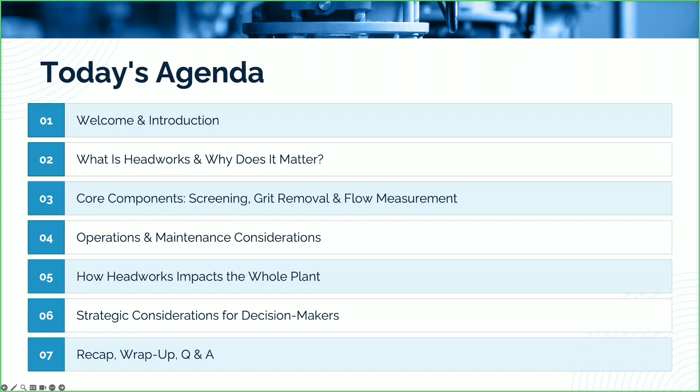All right, thank you everybody for joining us today in the first of our multi-part series on wastewater treatment, on the wastewater treatment train. Today we're going to be talking about the Headworks. We're going to start with what it is and why it matters. We'll talk about some core components, some O&M considerations, how the Headworks impacts the entire plant, particularly if it's not well maintained. We'll talk about some strategic considerations for decision makers, and then we'll have our recap, wrap up, and Q&A. As Zoe said, I'm a research engineer at the Southwest Environmental Finance Center.

We are in Albuquerque, New Mexico, close to the banks of the Rio Grande, and we do a lot of this kind of training and technical service. I've been with us for about 11 years now.

As we get started, I'd like to take about 30 seconds to just get a quick poll of who's in the room. I think we had over 600 registrants, but this is always good to give us an idea of who we are talking to today. Zoe, if you wouldn't mind firing up the first poll really quick, we'll give it about 30 seconds just to determine: are we looking at mostly wastewater operators or trainees? Are you a utility manager or director? I realize that particularly with small utilities, people wear a lot of hats, so if you sort of fall into more than one category, just pick the hat that you wear the most.

All right, it looks like most folks have voted. 7% as wastewater operator, trainee, or plant staff. We have 3% as utility manager, director, or board member, 58% as regulator or other government official, 21% as engineer, consultant, or TA provider, and 10% as other.

Okie dokie, pretty knowledgeable crowd here. Thanks for joining us.

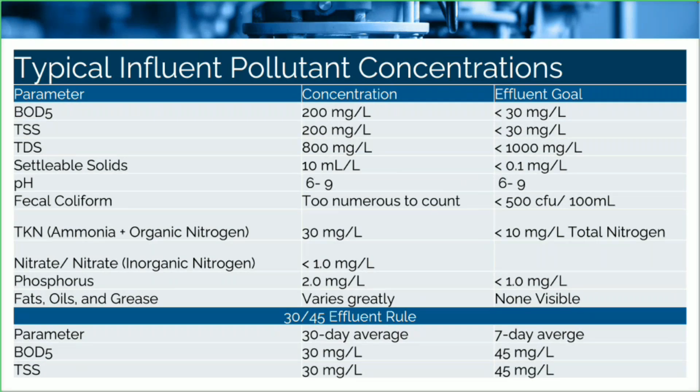What this largely ignores is all of the other stuff that ends up at your treatment plant as part of the influent stream that we have to get rid of in order to effectively treat our effluent. Basically, what I'm talking about here is trash - large, non-digestible organics like bone and sticks and roots, inorganic material like glass and sand and rocks, rags, building material, toys, pretty much anything that can end up in the sewer, including those non-flushable, flushable wipes that people insist on putting down the toilet.

There is a lot of debris that can show up in influent, whether you have just a normal collection system, or even more so if you've got a combined system, like the city of San Francisco, where stormwater is also a factor. So dealing with this extra debris is really what the Headworks are all about. It's as important as any of the other stages. It really sets everything else up for success, and in many cases, the long-term efficiency of your later treatment stages really depends on the Headworks functioning correctly.

Then we move on to our primary treatment, which is mostly physical treatment, clarification and settling. Secondary treatment, biological steps, some sort of disinfection, either UV, or if it's chlorine, then we're going to add a dechlorination stage as well. And then eventually some sort of discharge, whether that's to a complete evaporation lagoon for some of the small systems we have out here, or for land application, or into one of the waters of the United States, in which case you're going to have an NPDES permit.

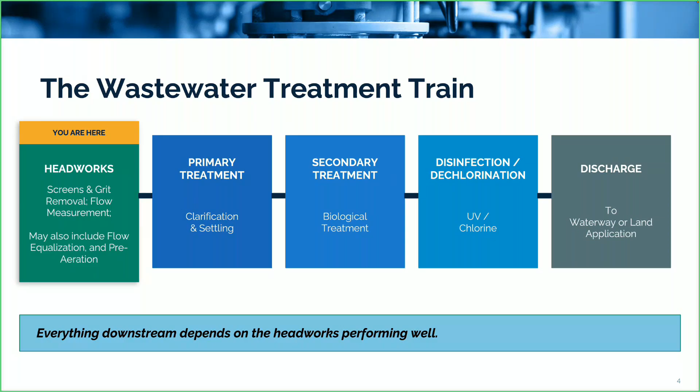Within the Headworks, we've got a number of physical processes that are going on, starting with screening, which is taking out coarse materials with the larger bar racks and trash racks. We might have fine screening to take out smaller components. Then we've typically got a grit removal stage, which is focused on sand and gravel and similarly sized detritus.

We might have a pre-aeration stage or a flow equalization stage, which is essentially just a set of basins or holding tanks where we can keep excess flow from either peak events or from peak flow times during the day, and run it through the treatment plant without dealing with those sort of peaks and swells, to even out our treatment processes.

Last but not least, and really, really important, is the flow metering stage of this. I see this a lot in smaller systems that I work with, both in our state and others, where flow metering is something that they don't either pay attention to very well, or the equipment is not well maintained. And as we'll see, if you are not paying attention to flow metering equipment, it is very hard to prove that you are staying within your permit discharge and flow limits.

And it makes it much, much harder to ensure that your processes are working the way they're supposed to. You will notice there is some reiteration in this session, but really everything downstream really depends on working well on the headworks.

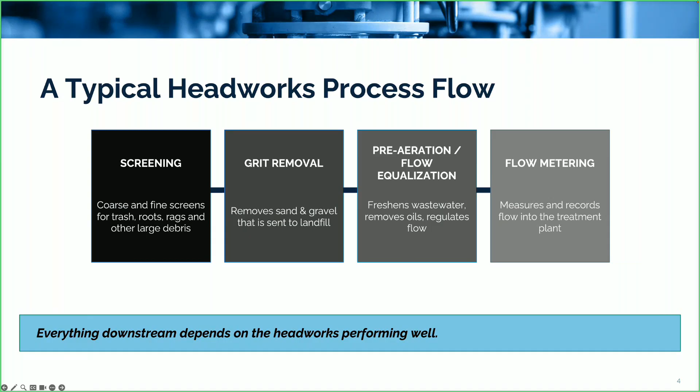For those of you who are operators or are some way involved in the wastewater treatment process, not on a consulting or regulating basis - of these four Headworks components that I've mentioned, which of these do you actually use? So if you can fire up the second poll question here: screening, grit removal, pre-aeration, flow equalization, and flow metering. Which of those do you have in your current facility, or is this just not applicable to you because you're not actually running a facility?

All right, it looks like most folks have voted. 30% said screening, 22% said grit removal, 12% said pre-aeration/flow equalization, 22% said flow metering, and 68% said don't know or not applicable.

That's about what I expected. As we'll see, pre-aeration and flow equalization are less common here in the United States, particularly with older plants. It's used a lot in Europe to help keep a smaller footprint, and it's incorporated into more modern designs as well. So it's not unexpected that not everybody has all of those components, but they're good to be aware of, particularly if you're getting to the stage where you might have to replace some or all of your system.

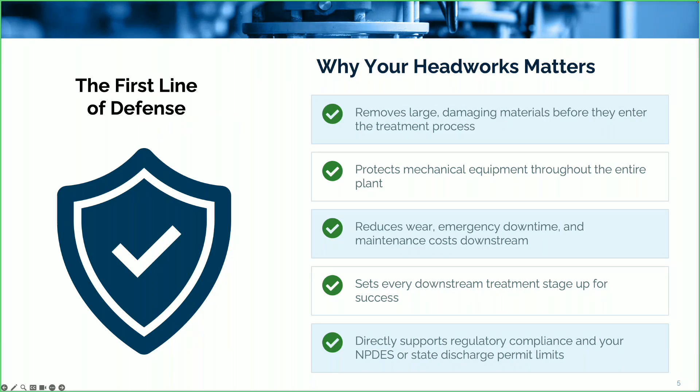When headworks fail—in other words, when they're not maintained or when they break down and aren't working correctly—a lot of bad things can happen. Pump ragging is a common one, where rags, wipes, and things that don't belong in the influent stream jam up pumps and either damage them or break them, or the motors that are running them. This can cause lots of expense and significant downtime, and if you don't have redundancy built into your plant, this can be a real problem.

Grit accumulation—that sand and gravel we were talking about—if it's not removed appropriately over time, it will accumulate in other parts of your treatment train, particularly in your primary treatment, which is the next stage after the headworks. So you can end up with grit in your basins, and this will over time reduce treatment capacity because there just won't be as much room in the plants or basins for the various processes to do what they need to do.

And of course, wastewater is not clear, so if you're not paying attention, you won't see it until it becomes a problem. The grit also damages pumps and a variety of rotating equipment you might have downstream, and there's typically a lot of that in clarifiers, scrapers, and things like that.

You also have the ability to really upset your processes if you're not paying attention to what's going on in your headworks—just like a major plug in the collection system can cause wastewater to become septic and deliver a shock load to your treatment plant when it eventually gets there. As we'll see, the first stage of screening, bar racks or trash racks, work as sieves if they're maintained, and if they're not, they turn into a dam, which leads to backup, which can lead to septic influent hitting your wastewater system.

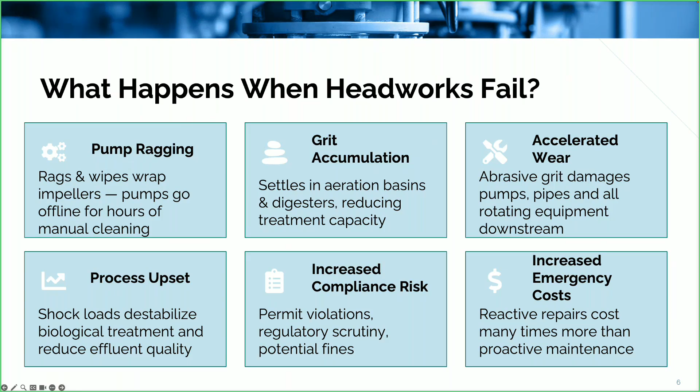There's also the regulatory context to think of, which I've alluded to. The Clean Water Act established our federal framework for wastewater treatment standards. Note that in some cases your state treatment standards might actually be a little more stringent. Every NPDES permit has facility-specific effluent limits and may have facility-specific treatment requirements.

If you're working at a utility in any context that deals with operations or decision-making, it's a really good idea to read and understand your permit so you know what you are liable for. State discharge permits have similar setups, similar effluent limits and requirements for solids handling, etc. You might even have specific components of Headworks required as part of facility design standards.

I can't list them all because we've got multiple jurisdictions here. This is one of those areas where you really need to understand the regulatory framework in your state, because that's what's going to apply to you. So requirements vary, and it's really important to know yours.

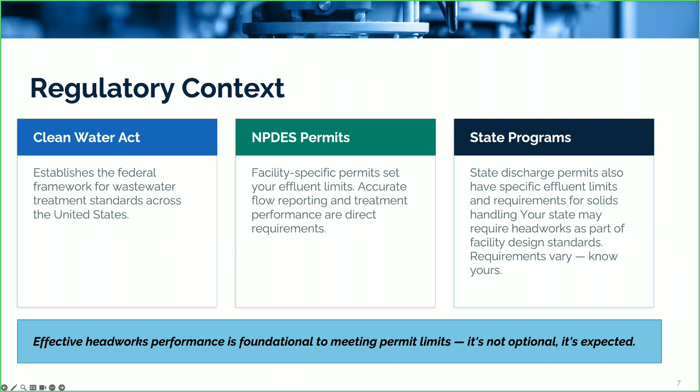Let's talk a little bit about core components, which are fairly basic. Most of them are related to removing trash. We're going to talk about screening, grit removal, flow measurement, equalization, and then odor control, which is often a part of that.

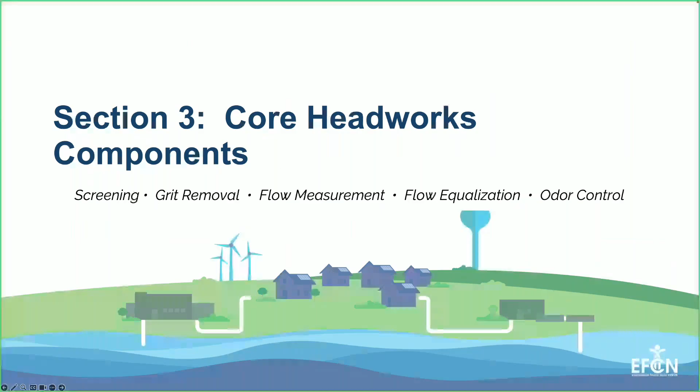Step one is screening. We're basically removing the big trash, wood, debris, plastic wipes, large solids that are in raw wastewater. This is entirely designed to protect the downstream processes and protect equipment. It's a pretty much completely physical process, and you may have layers of screens designed to capture different size detritus coming in your influent stream.

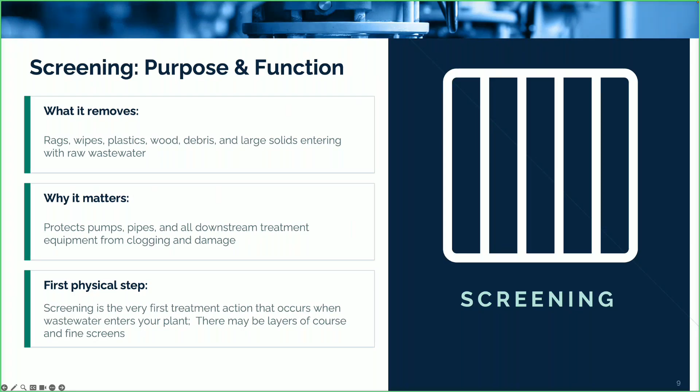Manual bar racks look something like this. They're typically slanted racks that sit in the influent stream and physically trap debris. They obviously have to be cleaned, or things will back up over time. There are manually cleaned racks that are typically going to be in smaller plants or in bypass channels at larger plants.

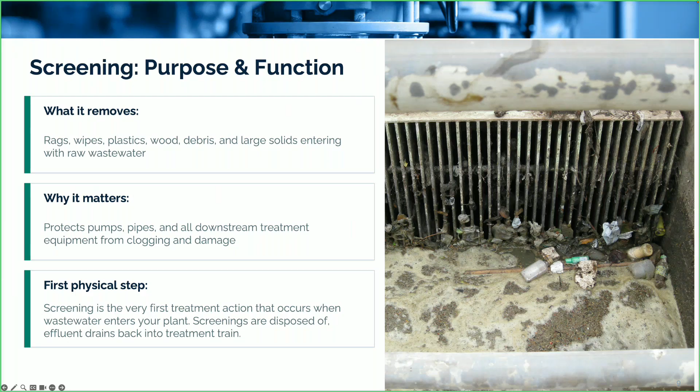The other option is a mechanically cleaned rack system. These could have rakes in the front or in the back, and there are pluses and minuses to either setup. They're usually either timed or driven by pressure differentials so you don't have a lot of head loss associated with them. But even the mechanical ones need to be maintained—there are motors, pumps, gears, chains, lubrication needs, and they can be somewhat dangerous to be around. So these have to be maintained very well.

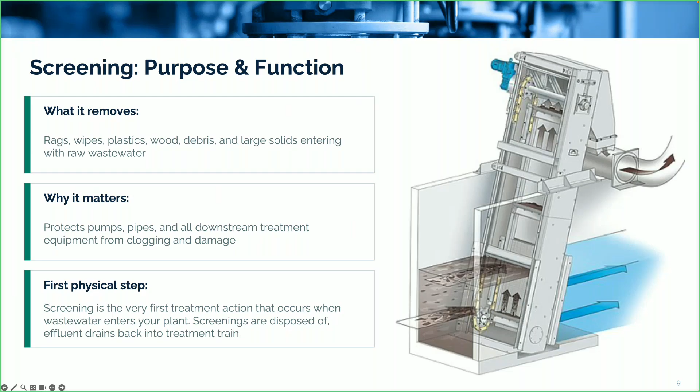This stuff is typically made of aluminum or stainless steel. Obviously, it's in water all the time, so we can't have corrosive metals in there. How they're described varies a little depending on the size of the rack, but also to some degree on where you are in the United States—different vernaculars are used. But typically, if it's 3/8 inch to about 2 inches, it's called a bar screen. Anything 2 inches or bigger is usually called a trash rack or a bar rack. And again, they can be manually or mechanically cleaned.

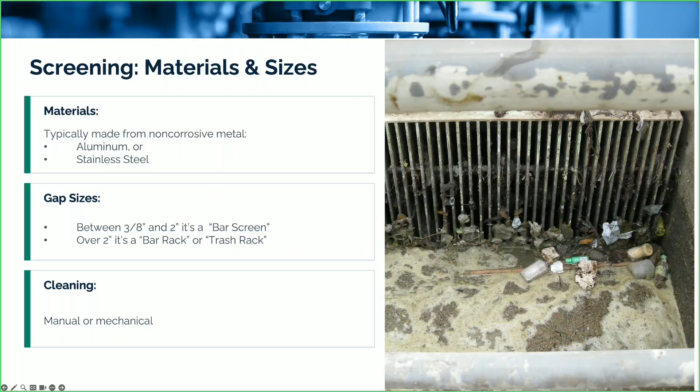This is a very typical small system setup. You can see some trash on there, slanted. There's a walkway above where technicians can use big rakes to pull trash up. Just below the feet, you can see there's a trough—that's where the trash goes so it can be dewatered. You can't just pull it out and throw it away; you have to get rid of the liquid associated with those screenings, and that will work its way back into the effluent stream.

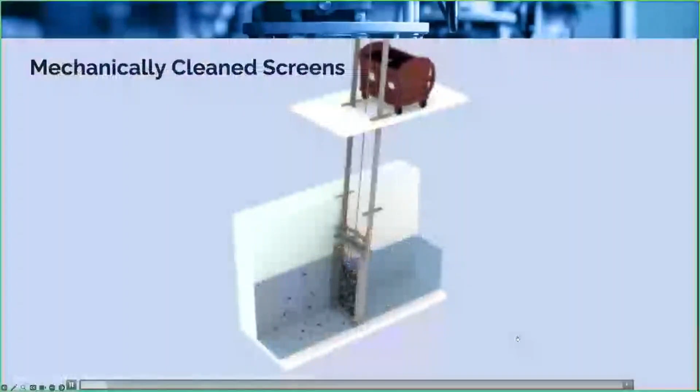Mechanically cleaned screens—here's a short video showing how they might work. This one happens to have the cleaning rack on the front. Some come on the back; if they're in the back, they jam less but don't clean as well. Front-cleaning versions tend to remove more trash, but they're a little more liable to jam.

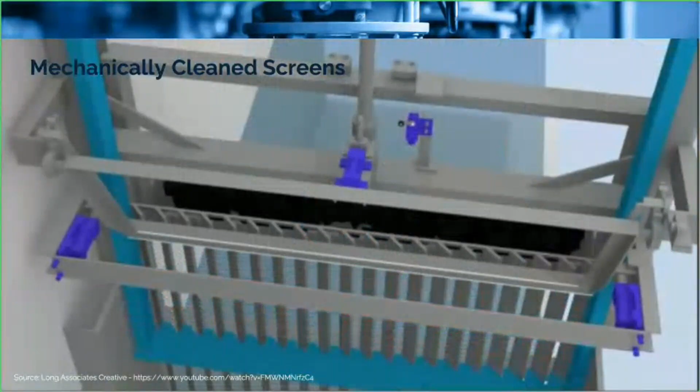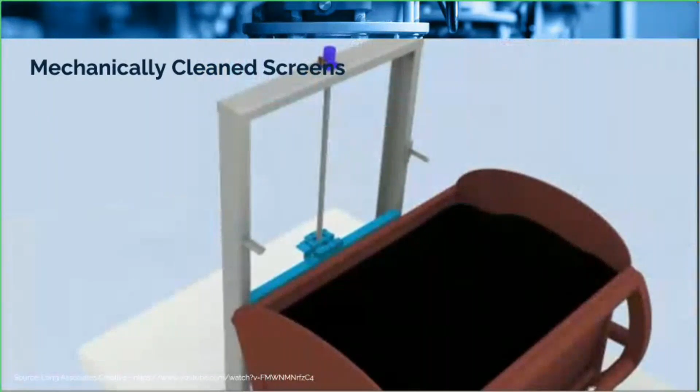Basically, what we've got going on here is a set of teeth on a rack controlled by pressure switches upstream and downstream that let it know when enough trash has built up that it needs to be removed. It's pulled out, dewatered along the way, and fed into some sort of disposal system, usually a hopper. There may be long channels depending on the size of your system, or conveyor belts that move it.

Which leaves us with a bunch of screenings we have to do something with, right? The trash has to go somewhere, and there are some critical steps when dealing with screenings. Number one, as I mentioned, they have to be drained back into the influent. Typically they're wet, and there's a lot of organic matter still on them, which can include disease-causing organisms. So at a bare minimum, they have to be drained before they're dealt with.

We'll talk about disposal a bit more shortly, but one key thing to remember about screenings and grit is that you don't want them lying around the plant for a long time—they can attract flies, attract vermin, and cause odor complaints. As you can see in the bottom right-hand corner, somebody hasn't been doing a great job in this instance of making sure all the screenings end up in the hopper where they're supposed to.

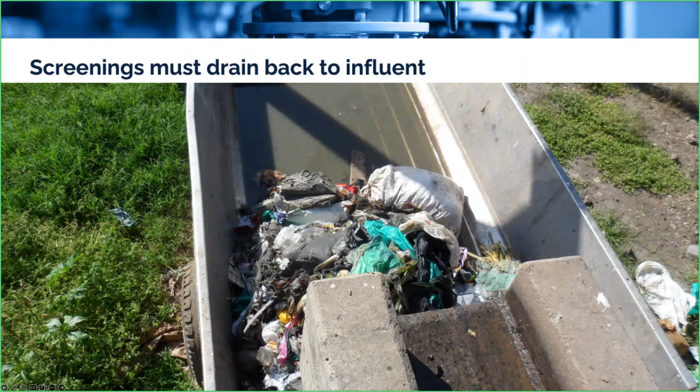I've got a slide in here about some basic design considerations. I'm not going to go over this, but for those of you who want to read the slides, it gives you a breakdown of which kind of screens are typically used for what size trash.

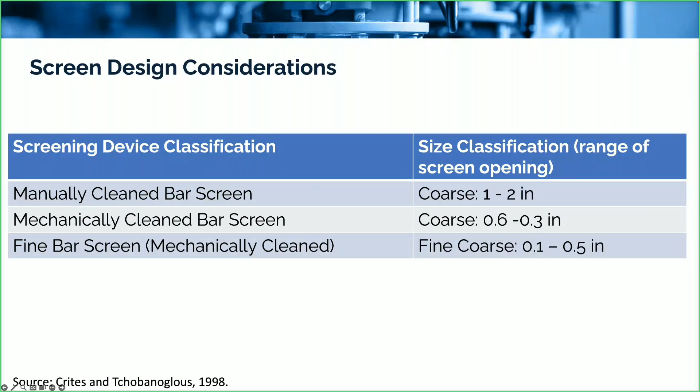So we get all the big stuff out, but obviously there's some gaps in those bars and some trash is going to make it through. So the question becomes, what do we do with that? The next step is either finer screens or a combination of coarse solids reduction and finer screens.

In this case, we're talking about industrial sized versions of the garbage disposal you have in your kitchen. They're not designed to remove anything, they're designed to chop it up into a manageable size that will facilitate flow through to the next stages, essentially preparing debris for later removal, not removing it at this stage.

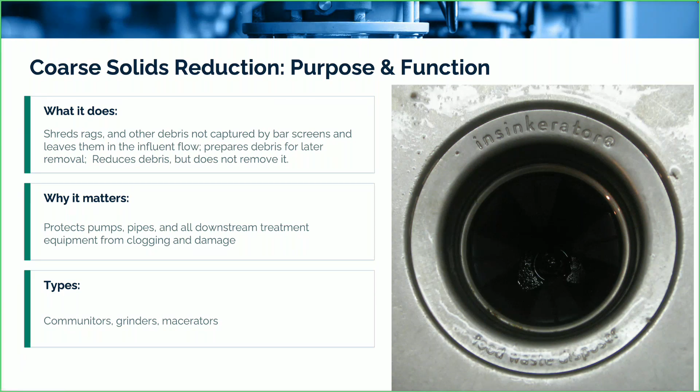We do this for the same reason we get the trash out, it's all about protecting downstream processes and equipment. There are three main types of coarse solids reduction equipment: communitors, grinders, and macerators. Communitors are the older version, typically not installed these days, but you see them in a lot of older plants. Communitors and grinders essentially do the same thing, sometimes called sewage grinders, and there's a blurry line between the two.

All they're basically going to do is shred anything that comes in, which will include hands and feet if you get them stuck in there. They're typically found in older plants.

Nowadays, in most designs, grinders tend to be installed upstream of the plant, although there may be some in the plant as well. So we'll often see these in lift stations or further up, to protect pumps at lift stations and things like that.

The pros of these is they can take the place of some of the bar screens, and overcome the disposal issues you have with the bar screen components themselves. But again, what they're doing is chopping bits up, you still have to remove it later.

Whereas a manual bar rack is essentially just run on people power, you need electricity to run a communitor. You still have to remove the shredded debris, so they can be labor intensive to maintain. You're going to need some sort of redundancy or bypass channel if one of these gets clogged, or if you've got high flow issues that you need to deal with.

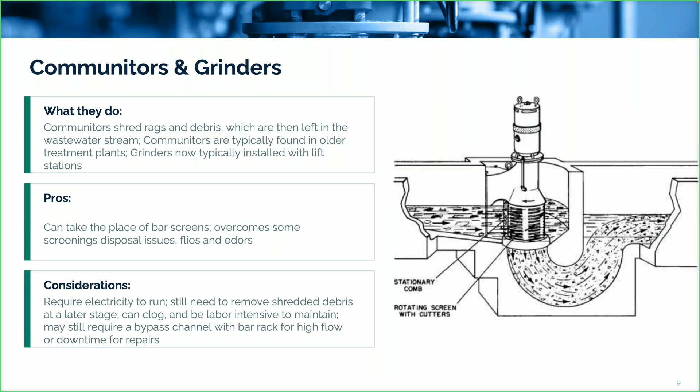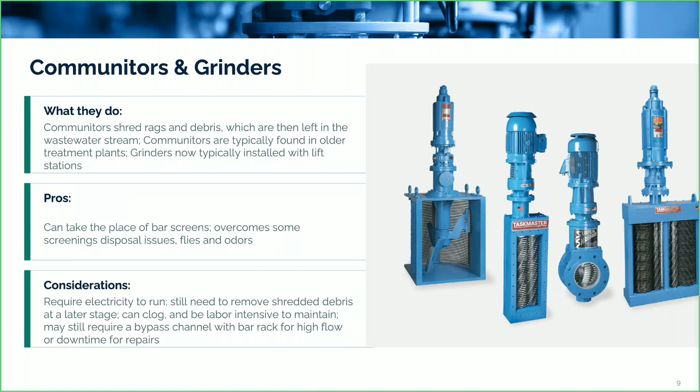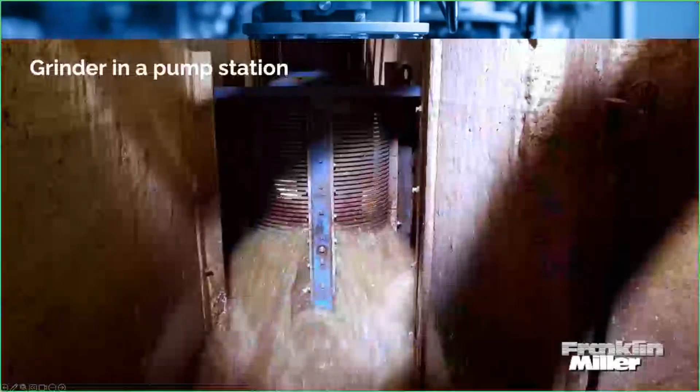This is the downstream side, as you can see. The goal here is to chop any debris small enough so that it can make it through those holes. And if it can make it through those holes, chances are it's not going to damage equipment further down, and we will theoretically have equipment further down the line that will help us remove it.

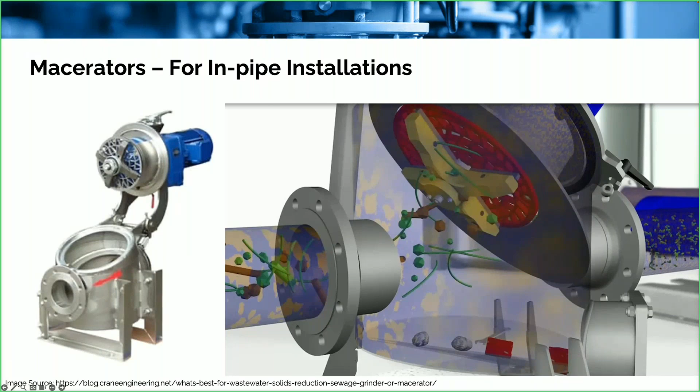Which brings us to our next topic, the fine screening stage. The bar racks are taking out the big stuff, fine screens are going to take out whatever is left and whatever's been chopped up by our coarser grinders. Again, the goal here is exactly the same as the earlier stages: protecting the downstream equipment and processes, but we're basically just trying to remove those fine screenings.

There's a lot of different types and technologies used here: steps, perforated plates, wedge wires, static screens, rotary drums, and probably some others not listed. What you're looking at right here is a step screen, which I sort of think of as analogous to an escalator.

Influent is coming in from the bottom with all of this chopped up mess. You can see the teeth are grabbing all the particulate matter, pulling it to the top where it's being dropped into a trough and then sent along its merry way.

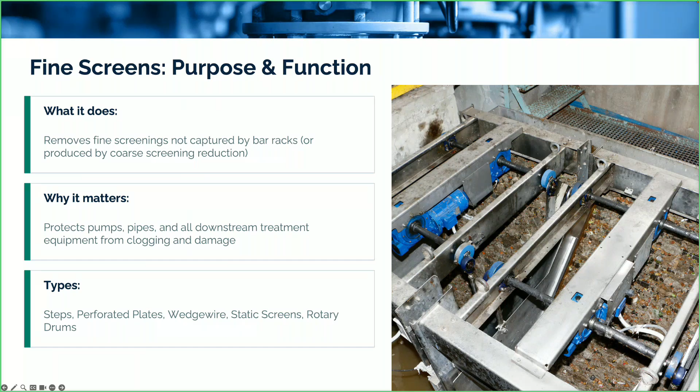This is the bigger picture, and you can see there's drains. It works more or less like an escalator. This one has wire screens in it. There are similar versions that use perforated plates.

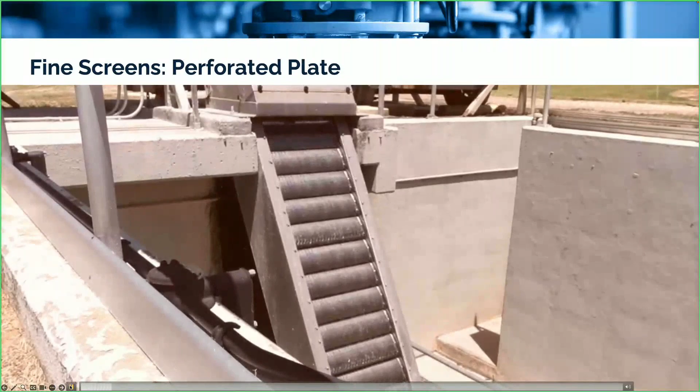This happens to be one down in Gatesville, Texas, a system we've worked with on multiple occasions. You can see it's basically the same sort of escalator situation. Those plates have holes in them. Anything smaller than the hole goes through, including the liquid. Bigger pieces stay trapped, and about every fifth or sixth belt there's teeth that will

grab larger pieces. The influent is coming in at the bottom of the screen. It's being dewatered as it moves to the top, and then once it gets to the top, it goes through a hopper after being dewatered a little bit more.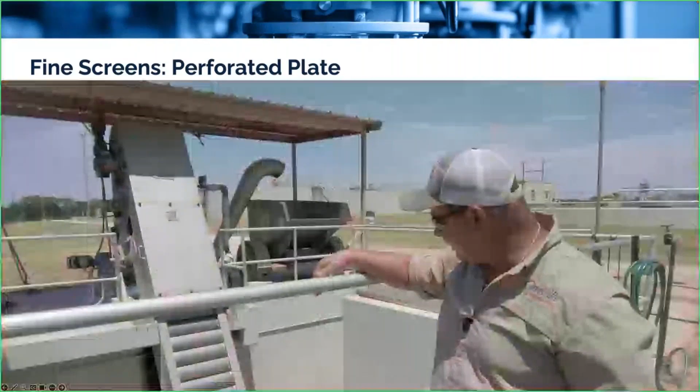You'll notice that hopper is not all that large, because again, this is one of those things where you want to get this stuff out and get rid of it in a reasonable time. You don't want this stuff sitting around attracting vermin, causing smells, and potentially getting people sick.

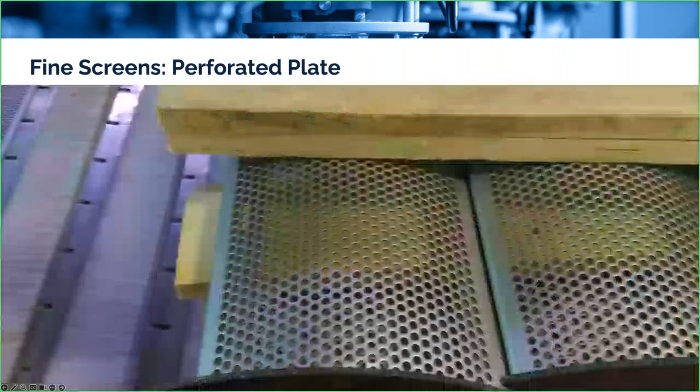Up close, the perforated plates look like this, very simple, just like a sieve. Anything smaller than the holes goes through, anything bigger than the holes stays in the equipment and is disposed of later.

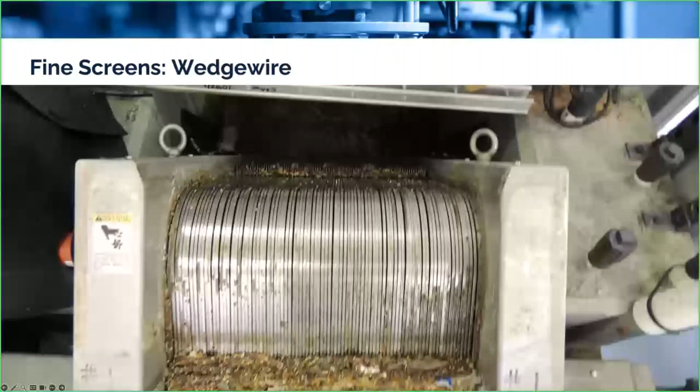Another option you might see is wedge wires. This happens to be set up from a small plant in Tenino, Washington. They have two of these setups, and it's a very similar situation.

You've got these wires with teeth that push up through them. They're grabbing materials at the bottom, pulling them up this process, and then the detritus falls off the end and gets dealt with. They've got two of these, and they can handle about 750,000 gallons per day each.

One thing to be really aware of, particularly as you're trying to solve headworks related problems, is to make sure that your processes are compatible. The operator that runs this facility mentioned they recently installed grinder pumps at the lift stations in their collection system. One byproduct of that was that the grinders were actually creating particles too small for this wedge wire setup to effectively remove. So by fixing one problem, they actually created another.

This is a design and planning consideration, particularly when you retrofit. When you're grinding, you've got to make sure that the equipment downstream that is going to be removing those particles is capable of handling the output of your grinders.

There are also static versions of these, static screens, which essentially have few to no moving parts. You can see one in place on the left and a cross section on the right.

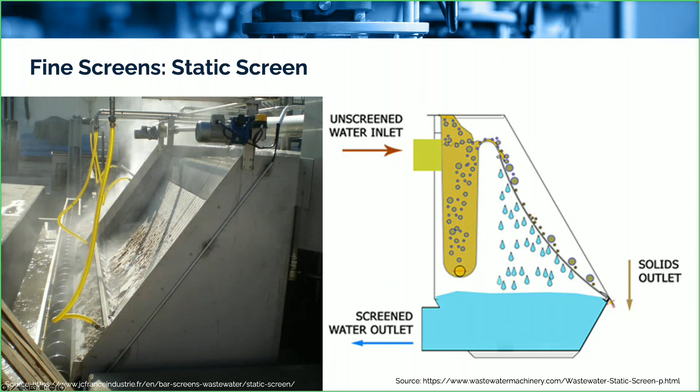These are very quiet. They pretty much only need regular cleaning. The screen itself doesn't really have any moving parts, although you of course need pumps to run the aerators, motors to run the worm screws, and sprayers. They do require some maintenance because organics and biofilms will build up if you don't maintain them.

The last version I'm going to talk about are rotary drums. Again, these are all versions of the same thing. There's some sort of perforated mechanism that allows liquid to flow through and solids to be captured.

This one also happens to be at Gatesville. You can see they've got multiple stages in place handling different sized detritus that is in their influent stream.

These basically work by pumping the influent into the middle. The drum is spinning around, and centripetal force is forcing the water out. At the bottom, the solids discharge onto their next stage, and they're both dealt with.

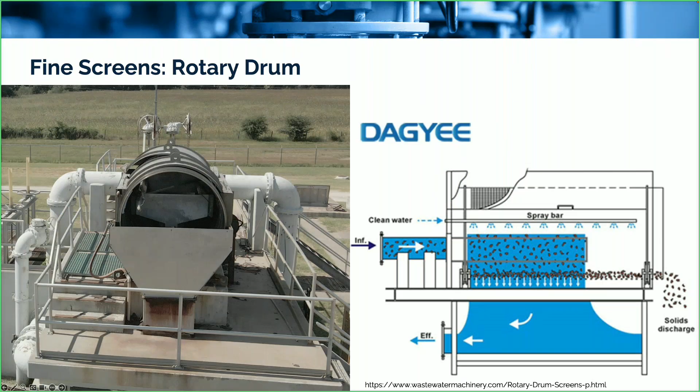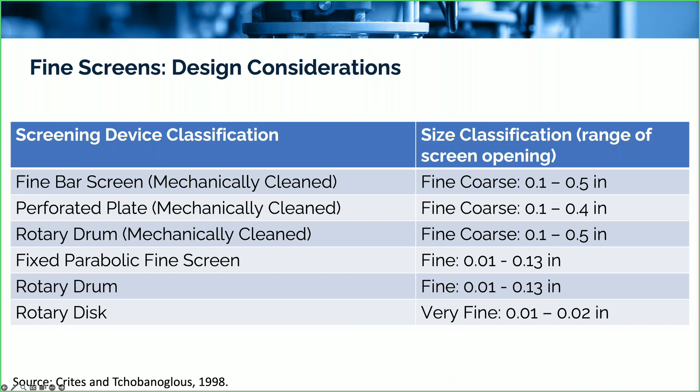Once you've got the screenings, you've got to handle them, and it can be pretty substantial. 1 million gallons of water could generate anywhere from 1.5 to 8 cubic feet of screenings. So if you've got a large plant, you're probably going to have a large amount of material to deal with. And obviously, the smaller the openings in your screens, the more stuff you're going to catch.

Those screenings have to be dewatered, because there's going to be some organic matter included, and they have to be disposed of. How they're disposed of depends on the specific situation. Some places incinerate them, some places send them to landfill. This is one of those know-your-local-listings situations, because requirements may vary depending on where you are, what your screenings consist of, and there are typically permit requirements around these.

As a general rule, you don't want this stuff to build up. A small plant might not collect a lot in a day, but you still want a very robust screenings management plan so that it's not building up, for example, over the winter and then sitting out there rotting when summertime comes.

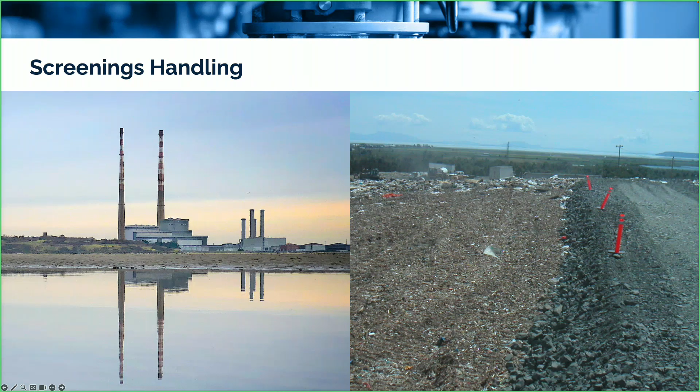So that's all the big trash. What's left in the stream? Well, a lot of organics, which are suspended hopefully, and a lot of grit, typically things like sand, cinders, rocks, coffee grounds, eggshells, seeds. It's mostly inorganic material that isn't digestible, but can also include some organic material that, although theoretically digestible, isn't going to be dealt with in the detention times for the processes you have in your system. An eggshell will probably break down over time, but not in your wastewater treatment plant.

This is the abrasive stuff I was talking about that typically accelerates wear on impellers, pipe interiors, and rotating equipment. The larger trash jams things up and blocks things. The smaller stuff wears away at equipment and also has the potential to settle and accumulate in tanks, which essentially steals capacity from your aeration basins. Over time, if that accumulation gets big enough, your calculations are going to be off because the volume of your tanks isn't what you think it is.

This stuff also doesn't degrade. Once it's in your system, the only way to get it out is essentially to shut down the basin, clean it out, or get some sort of pumper in there. You're going to have to do maintenance to remove it, and that can be costly and disruptive. So grit removal is a really important stage to protect that equipment and those processes.

Typically we're talking about small particles, like 1/5 of a millimeter, with a specific gravity of about 2.5, meaning they're 2.5 times as dense as water—which is important to remember, because using that information is how we remove grit.

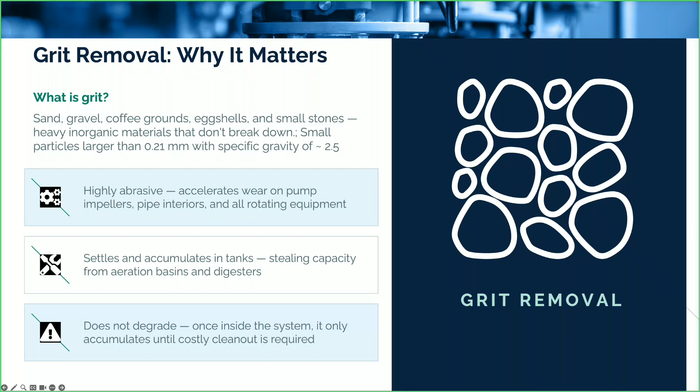We do that by basically slowing the velocity of the water down to around 1 foot per second. At that speed, assuming we've got a grit channel or basin designed to handle it, the grit will settle out into the bottom of the channel, while the organics that we'll deal with in primary sedimentation and biological treatment stay in the water. So this is basically a way of sieving out the grit and stones, letting them fall out of the flow simply by controlling the velocity of the water.

This is a top-down view of what a typical basic grit channel looks like. Usually you've got at least 2 channels so you have redundancy for repairs, maintenance, and flow stabilization. They're narrower at the bottom than at the top, and the length is typically pretty long—maybe 50 feet or more—designed with that 1 foot velocity in mind, so that the vast majority of the grit in the effluent falls out in the channel and doesn't get through.

You'll notice at the top there, we've got influent going back to the plant. We have a dewatering drain, and in some very basic versions you might have to drain one side and manually remove grit, but usually there are mechanical scrapers working on the bottom, slowly taking the grit out of the channels.

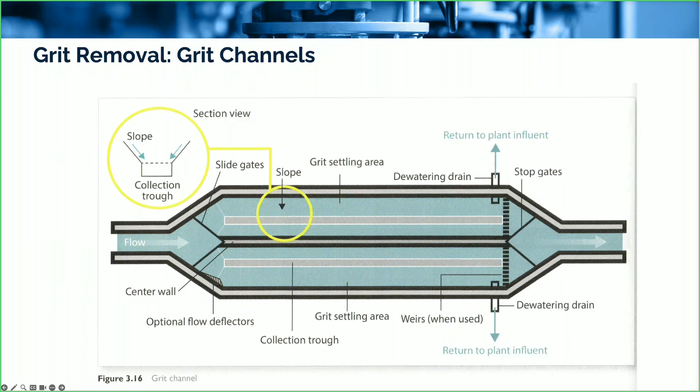Got another table for you. Again, not going to read it, but this is just sort of a description of what the individual pieces do. If you want a more in-depth view of these specific processes, we have another webinar series that we did recently that was designed for operators trying to pass their certifications, which goes into the real nitty-gritty of these.

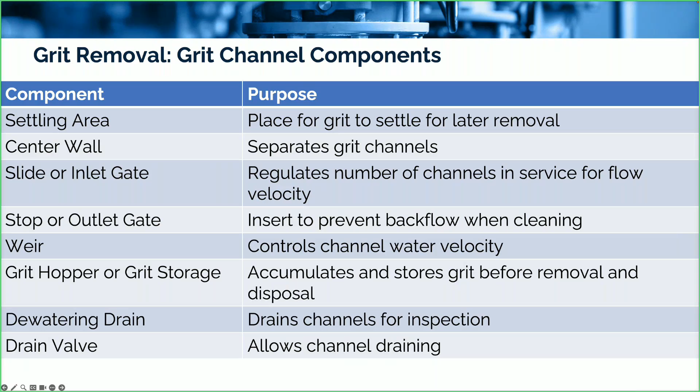But most of these are going to have similar components where you've got settling areas, weirs, and dewatering drains and things like this. A real basic setup might look something like this. This one happens to be in Kenya. This is not currently in service and arguably is an example of how not to do it. You'll notice there are piles of grit on either side that they've pulled out of the channel. That is not good practice, but this shows you the order of operations, where you've got your bar racks, in this case manually cleaned at the front, and then you've got these grit channels immediately behind it, and then you've got your next stage processes off to the right here. Just in case you weren't sure, that's the grit channel right there.

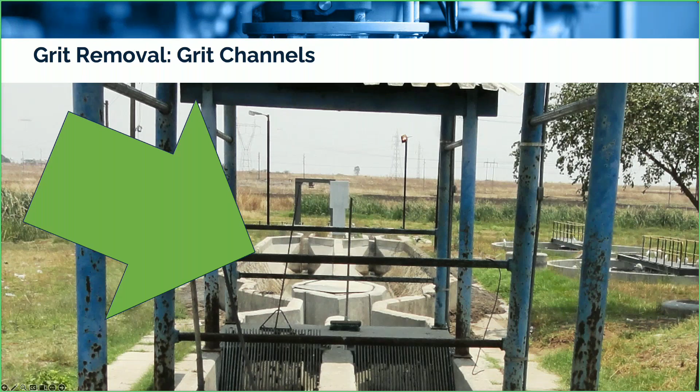So they can be really, really small if you've got small or low flows. They can be huge. You can also end up removing quite a lot of grit, usually less than trash, but it's anywhere from 1 to 4 cubic feet of grit might be removed from every 1,000,000 gallons of water. This is the sort of basic non-aerated version. There are aerated versions of grit removal processes as well.

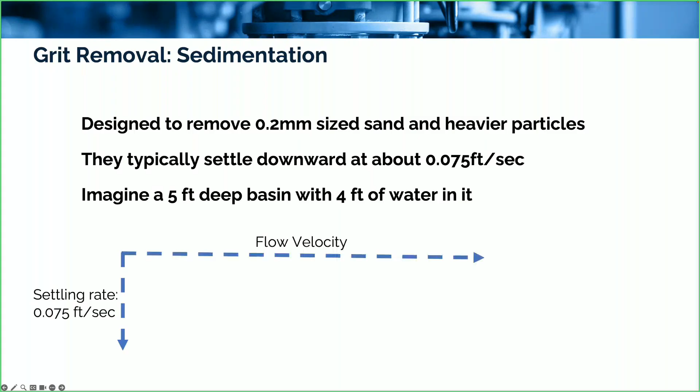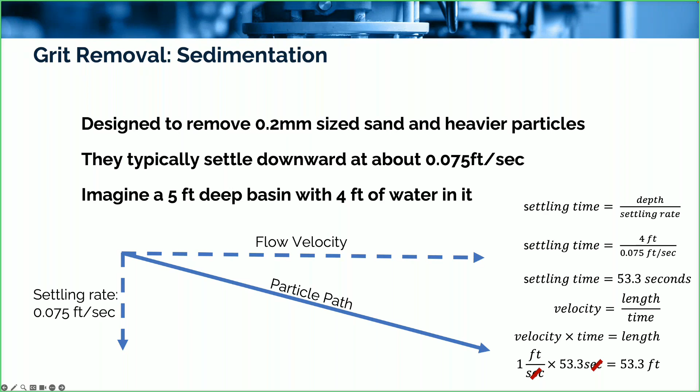But basically, all of these processes work through what's called sedimentation. The idea is that the grit is denser than water, so given enough time, it will sink to the bottom. We've got a flow velocity through the channel, so it's moving, in this case, left to right at a specific velocity. And if we give it enough time, the particle will fall to the bottom of the tank. There's some very basic math that I'm not going to go over, because that's not what this session is designed for. But we can use that basic math to both adjust the flow rates in our system, and also to verify that the flow rates we have are appropriate for the facilities that we have.

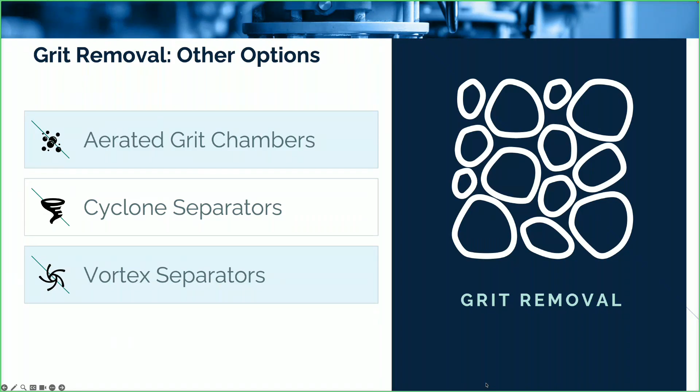There are other options for grit removal, which use, in one case, very similar principles, and in another case, very different ones. We have aerated grit chambers, then we have what are called cyclone and vortex separators. An aerated grit chamber is basically a high-tech version of a grit channel, where we include aeration into the system, because that air-water mix is even less dense than water, so the grit tends to fall faster. These typically have automatic grit pumps. The aeration also induces some currents into the flow, which helps push the grit to the bottom.

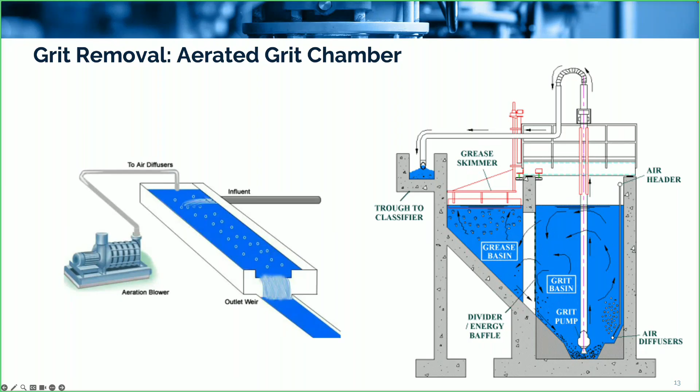So the idea is, this is a cross section, we've got some air being dispersed into there, which slows the velocity, and also lowers the specific gravity of the water, so that the relative specific gravity of the grit and the fluid it's in are even broader. That rolling action by itself induces some currents. Those currents help facilitate moving grit down toward the bottom, where it moves into a channel that has mechanical scrapers. Detention time on this kind of setup is typically pretty low. So the flow in there, any given section of water, is going to be in there for about 3 to 5 minutes. These are very efficient, but do need some space.

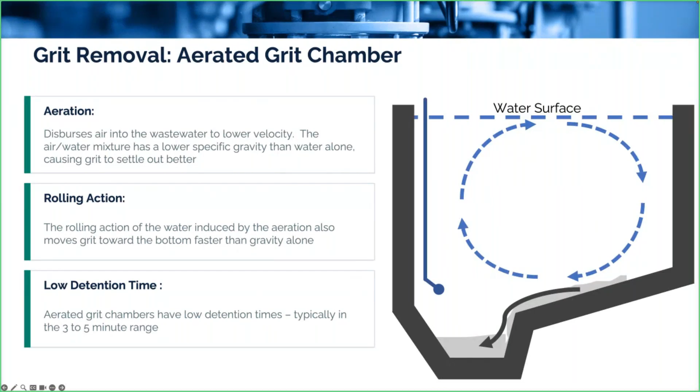Other options are cyclone separators, which work more or less like the dust collection systems in a woodworking shop. If you've ever been to one of those, basically the influent comes into the chamber at a tangent. That by itself creates a vortex. The grit falls to the bottom, water leaves near the top. One of the benefits of these is they don't have any moving parts, and they are relatively compact, so they've got a relatively small footprint. It's the influent stream, again, that creates that cyclone. Of course, you're going to need an auger mechanism at the bottom to move the grit that you accumulate out. And of course, you're going to need some pumps probably to regulate the flow, so there are still energy needs.

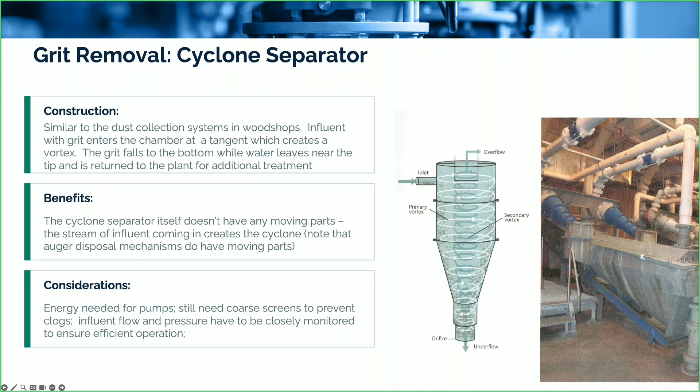You still need coarse screens upstream, but this is another way to address grit without using a channel. It's an approach that typically uses a smaller footprint. That being said, the flow and pressure have to be monitored fairly well, because these will only operate correctly within a range. Although this picture shows it vertically, typically they're set at an angle, something like this.

Last but not least for today, we've got vortex separators, which are just fancy versions of the cyclones. They're typically proprietary, pretty efficient, and designed for very small particulate grit. Pros: no moving parts other than the pumps you're using to generate them and the sumps to pull the grit out. They provide pretty consistent removal efficiency over wide flow ranges and have a very small footprint, but you're going to need redundancy. Because of the way they're designed, with the grit sump at the bottom, if you get clogs down there, they can be more difficult to repair than some of the open channel type situations.

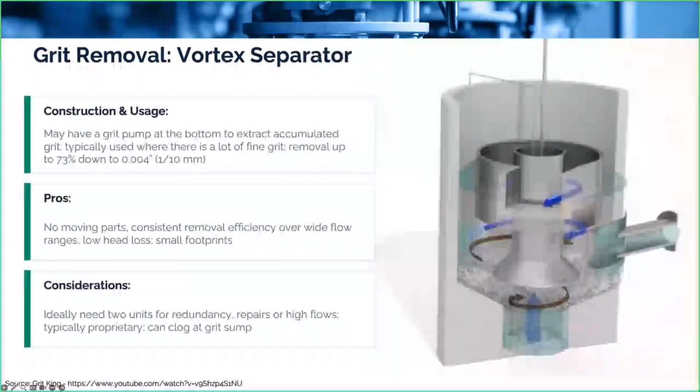So there are a lot of different ways to get grit out of the system, but like the trash you remove, you've got to do something with it. What you do with it depends on what shape or quality the grit is in. If your grit ends up with a high amount of organics on it, we don't want any of this stuff soaking wet when we try to dispose of it, but we also want to get rid of most of the organic matter to avoid nuisance smell and vermin problems. So we might have to wash the grit.

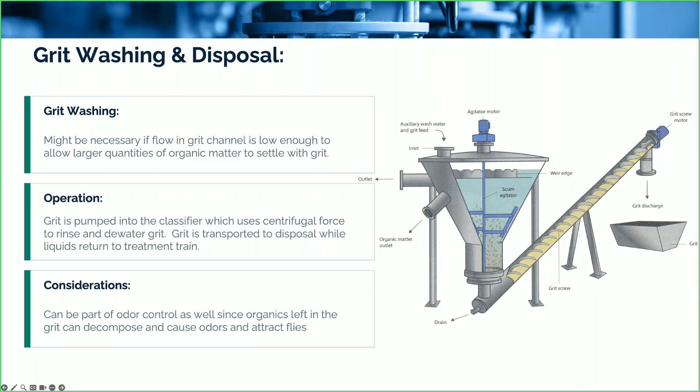You might have a grit washing setup that typically looks something like this. It's essentially a large washing machine, where the grit flow is pushed in - this is the separated grit from prior steps. It's agitated inside this basin. There's a weir at the top so the effluent flows out the top, and then the now cleaner grit moves up a worm screw or along a belt out to a discharge bin where it is sent out.

So I've got another poll question for you just to see what's in use out there. What kind of grit removal process does the system you work at use? You may have more than one, so feel free to check all that apply. Are you using grit channels, aerated grit chambers, cyclones, vortexes, or a grit classifier washer, which is what that last piece was that I showed you?

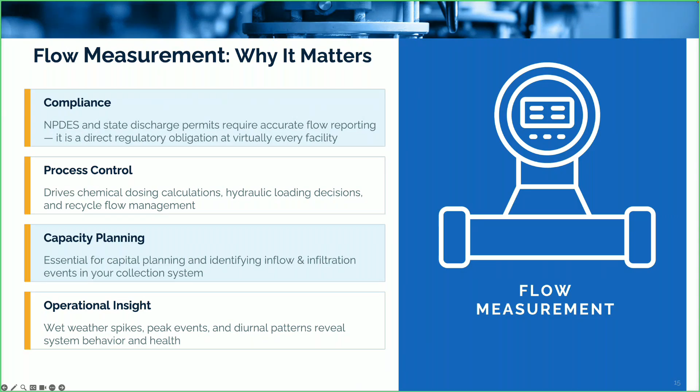Flow is going to be measured a lot of different ways. There are a lot of different tools. The goal here is not to exhaustively go through which might be best for your current situation. My main point is that the flow should be measured, and you should have something appropriate for your system. If you've got failing equipment, think about what might be appropriate and what's going to help you in the future. So you might have weirs, Parshall flumes, ultrasonic meters, or magnetic flow meters. They're all very accurate. Some are simpler to maintain, some are slightly more accurate, but the point is you really want to be able to measure those flows for the reasons that I talked about.

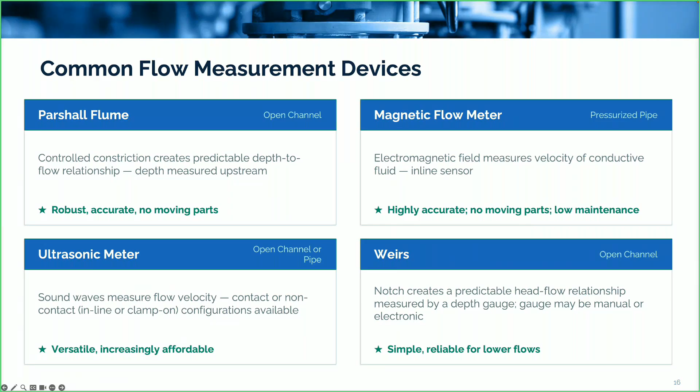Last but not least, we're going to talk about flow equalization and odor control. This isn't used as much here, but as we noted from our earlier poll, there are some systems that use it. Basically, this is just to help you even out the flow patterns.

It's also a strategy that can be used to facilitate a longer life of a plant that maybe has outgrown its capacity, at least as initially designed. Typically plants aren't running full bore all the time. You've got high flows resulting from morning activities, then it tapers off and picks up again in the evening. One way to deal with increased growth is to add flow equalization tanks that allow you to essentially capture and hold some of that flow so you can have a more even flow through your system. Obviously they have to be sized to account for extreme flows, particularly if you've got a combined system like I was talking about.

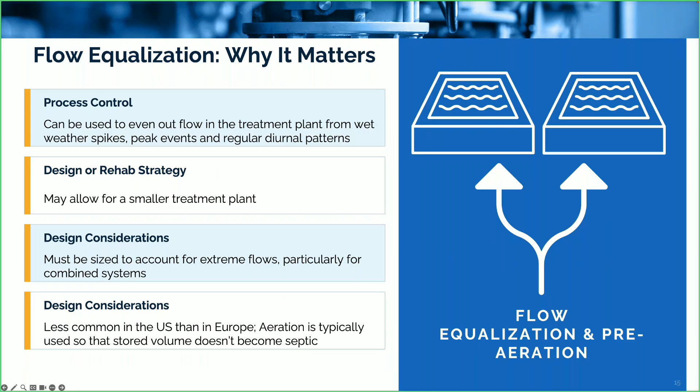Part of this is odor control. Obviously, maintaining your headworks efficiently and getting rid of the trash and grit that builds up is step one. There are other odor issues that can happen further on in the processes, but smells at wastewater plants are typically the result of organic decomposition.

There are a lot of compounds that can cause smells: hydrogen sulfide, ammonia, mercaptans, indole, skatole, things that are either generated by the decomposition or that are just part of the wastewater itself. Skatole and indole are part of feces, part of why it smells.

Aeration, capture and treat, removing screenings frequently. These are all management strategies that you can implement if odors are an issue.

I do want to point out that there are a lot of other gas byproducts, some of which are not necessarily good for us, like methane, that are part of wastewater treatment that don't have any sort of smell, but can be problematic as well.

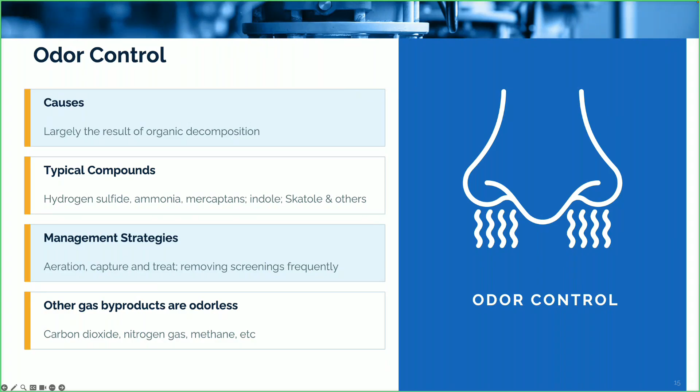Gas control, odor control, something to pay attention to, which brings us to O&M considerations. All of this stuff has to be maintained.

Every wastewater system, every collection system should have an up-to-date operations and maintenance manual and SOPs and training, so standard operating procedures and training, particularly safety training, that goes along with them.

I know a lot of plants that operate entirely without them. And in theory, if you're an experienced operator, you might think that's okay, but you're going to leave eventually. Somebody else is going to come in. So it's really important to have those processes written down so that we're not just winging it, and also so that we can monitor and log what's going on so that we can deal with them.

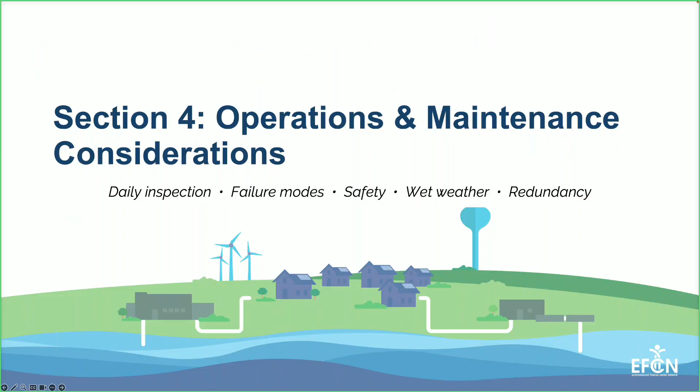Daily inspections of headworks are, in my opinion, mandatory. Making sure that the screening operations are working correctly. Those bar screens, if you are not paying attention to them, the sieve turns into a dam.

Same thing with the grit system. Is grit making it past the collection systems into other processes? Are there odors that aren't supposed to be there? Are your screenings containers filling at the rates that you expect? Are you disposing of them appropriately on an appropriate schedule? Are your flow meters doing what you expect?

You spend some time working in a wastewater treatment plant, you get to know or get very familiar with daily flows, seasonal flows, and the changes resulting from them. And even flow meters have to be maintained. They have to be installed correctly, but they also typically have to be calibrated periodically.

Sensors, particularly in flumes and weirs, might need to be cleaned on a regular basis to make sure that you're getting good readings. And if you've got a SCADA system or electronic transmission of data from those sensors, that has to be maintained as well, because signals can get dropped. So it's really important to keep on top of those, take those readings on a regular basis, because when things go off, that's a signal that something isn't going right.

And then, of course, safety is paramount. Make sure that the appropriate PPE is in use, that staff are trained in emergency procedures. If you've got enclosed spaces, make sure you've got monitors, that people aren't going into enclosed spaces that might have hydrogen sulfide or other gases built up in them without the appropriate training and equipment, and making sure that confined space and emergency equipment is available and accessible, and that people know how to use them.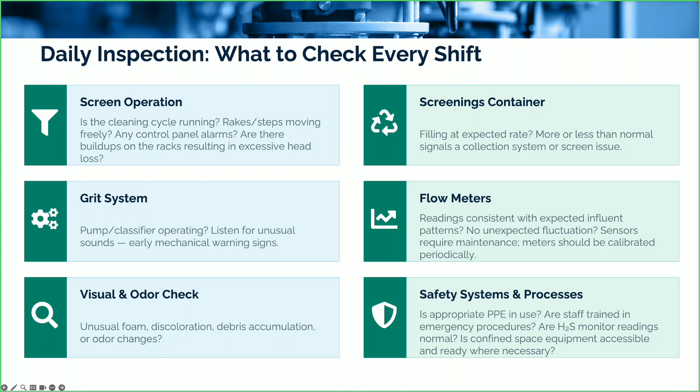Common failures we see at the headworks: things like screen blockages, downstream ragging, grit carryover, basically all of the things I talked about at the beginning that are likely to happen if the screen isn't maintained. We've got some basics here. This is not an exhaustive list by any stretch of the imagination, but these are some things to pay attention to and some root causes you might be running into.

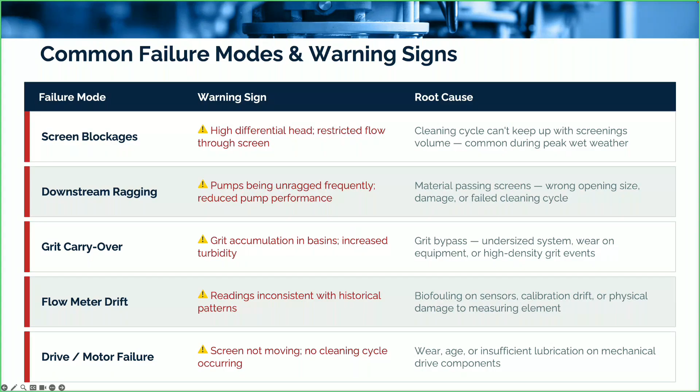Weather and seasonal operational changes are also something you really need to be aware of for the reasons I talked about before. Again, if you've got significant I&I problems, those are going to impact your plant. You really need to be aware of them and prep for them, or at least log information so that you'll notice over time when those problems develop.

Obviously in cold weather, we've got basins, there's a lot of water around. You want to make sure that people don't slip and fall. Freeze protection might be required in some parts of the country. There are wastewater treatment plants in Alaska that are entirely enclosed because of the temperature issues.

And every spring, it's a really good idea to inspect your equipment. Again, if you've got a good O&M plan, that will include information on when specific equipment needs to be checked, maintained, lubricated, etc., so that you can stay on top and stay more proactive than reactive. There's always going to be some reactive maintenance that's required, but you want to be on the proactive side of things.

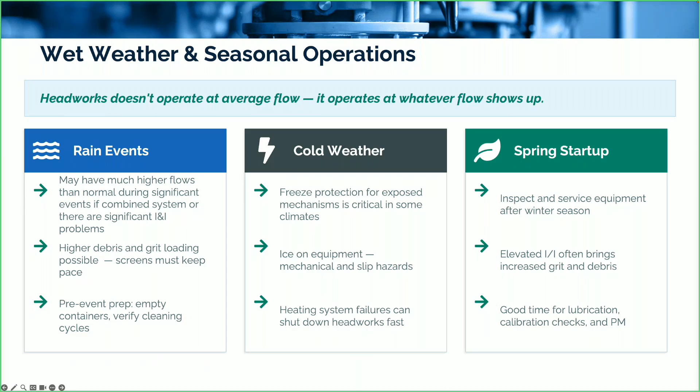Ancillary to that is redundancy in your system and having spare parts. Where you're located in the United States is going to impact these decisions. If you're in a major metropolitan area, things like screen rakes, teeth, drive chains, and grit impellers might be readily accessible and deliverable within a couple of days. If you're out in the territories, like Guam or CNMI, everything has to be flown or shipped in, so we're talking about months, not days. You have to plan accordingly.

You need to be aware of what is going on in your system, what things are likely to fail, what you need to have on hand, what you can get quickly, and pay attention to pricing if you can, because particularly right now things are changing pretty quickly.

Also, make sure that the redundancy built into your system stays in your system. Most facilities have 2 screen channels, most lift stations have 2 pumps. Working with a system recently, we found a lift station where one of the pumps had been out for a really long time, and nobody really knew it. The other one wasn't working at full capacity either. When we did the math, we realized if that second pump went out, they only had about 14 hours of capacity before that lift station overflowed. So you need to be aware of what's going on throughout your entire system, but again, at the Headworks especially, because problems there can run through the entire plant.

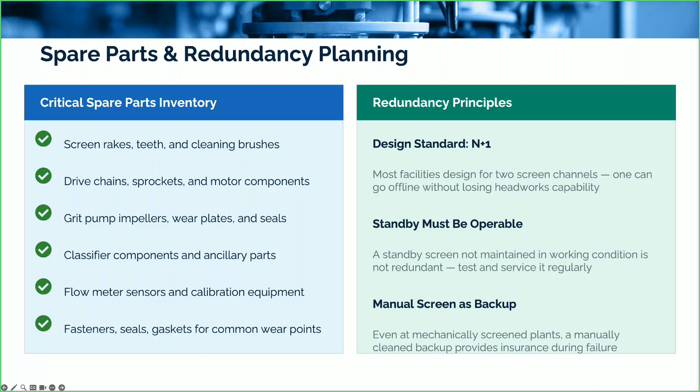Safety is obviously paramount. I've touched on this, but there are a lot of hazards in wastewater treatment in particular, and around some of the equipment we have at Headworks. There are mechanical hazards, gas hazards, electrical hazards. If you're doing confined space entry, make sure that's done appropriately and permitted correctly. Water safety is huge - particularly aerated basins don't provide any buoyancy, and if you fall in, there's zero visibility. Make sure everybody knows what they're doing and that the appropriate safety equipment is available, like flotation devices and things like that.

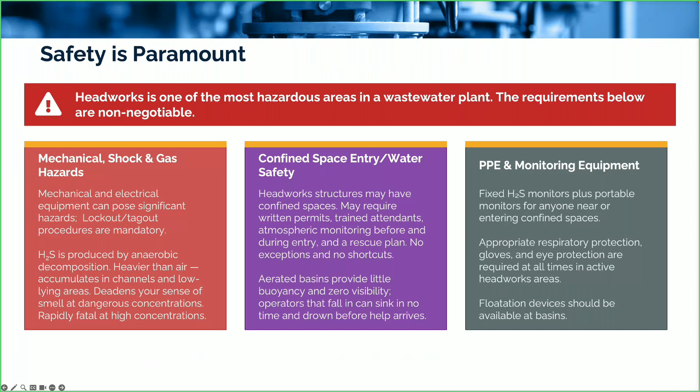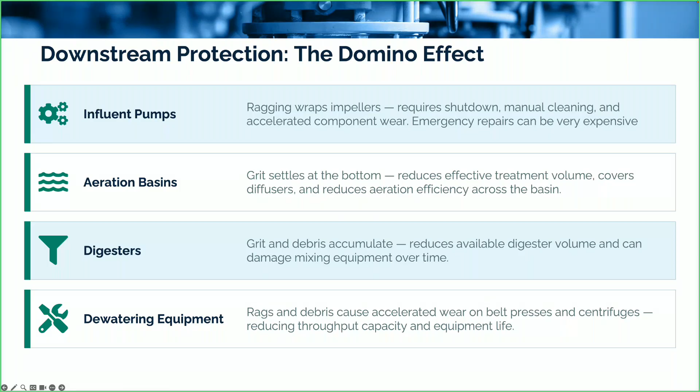As you've probably gathered, I keep repeating this - Headworks performance impacts everything else down the system, whether it's influent pumps going down, digesters, dewatering equipment, whatever. Although most of these systems are fairly basic and don't need a ton of maintenance necessarily, it's really important to recognize that a proactive approach to maintenance is better than a reactive one. Pump repair could cost $5,000 to $25,000 depending on the size of the pump. Cleaning out a grit basin can cause significant downtime and expense. All of these things can turn into unplanned events, which are always more expensive.

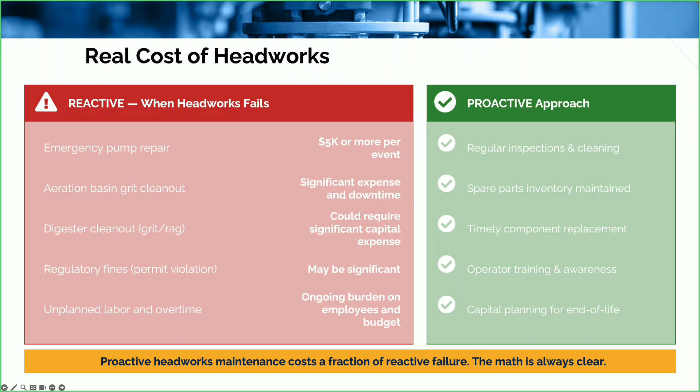Running a little short on time here, but I want to point out a few things related to capital planning and some strategic decisions you have to think about. Everything in your plant and collection system is going to deteriorate. Screens might last 10 to 25 years. Grit removal systems, depending on what they are, might last 20 to 45 years, could be less, depending on how they're maintained. Asset management is a really good way to stay on top of this, but even a simple spreadsheet tracking equipment age, condition, and maintenance history will give you a much better way of planning for the future, so you can see things deteriorating and intervene before they fail.

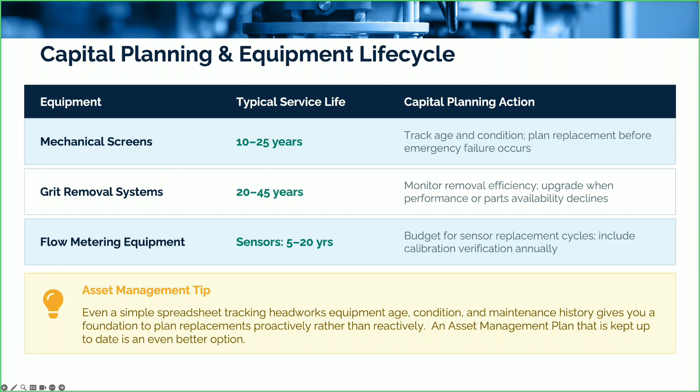Some things might be okay to run to failure, but other components of a wastewater treatment plant are not ones you want to let run to failure. Although there's a lot of money available for public wastewater treatment plants through state revolving funds, USDA Rural Development, and individual state-specific programs, in order to qualify you have to be prepared - you have to have shovel-worthy and shovel-ready projects. Although TA providers and your regulators can help with this process, it's really important to be ahead of the game and know what you're going to need and when, because the timeline for project funding, development, planning, and construction is not short.

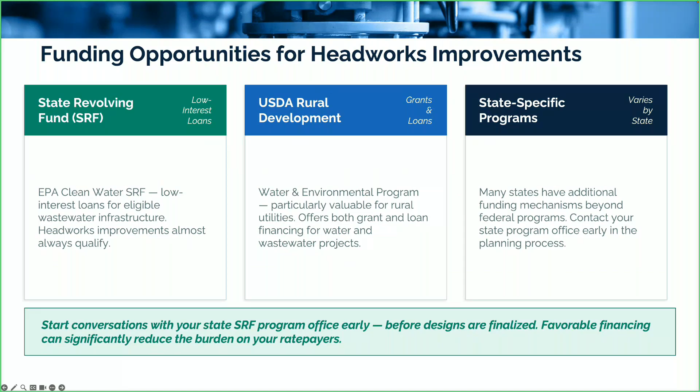Even relatively simple projects can take 3, 4, 5 or more years from inception to completion. So this is really one of those early-bird-gets-the-worm situations, or at least an early bird has a better chance of getting the worm. If you wait until equipment is broken, obsolete, or failing to start planning, you're going to be too late. Again, these processes are measured in years, not months typically, unless you can write the check yourself - and even then, because of permitting and planning, it takes a long time.

So, very broad overview, I realize that. Key takeaways: Headworks is the foundation of your treatment system. What happens there affects everything downstream.

We've got some very basic critical components: screening, grit removal, flow measurement. This is all mostly about removing trash so that the processes downstream work the way they're supposed to, and measuring the flow and adjusting the flow so that you can keep your processes in balance.

Try to be proactive if you can. It's always cheaper to do it that way, and collect and monitor Headworks data, because it's going to really tell you a story about your collection system upstream, and your facility health.

And last but not least, of course, there's a lot of money available to make upgrades, but the timeline for getting that, and for getting those projects implemented, is quite long. So start early.